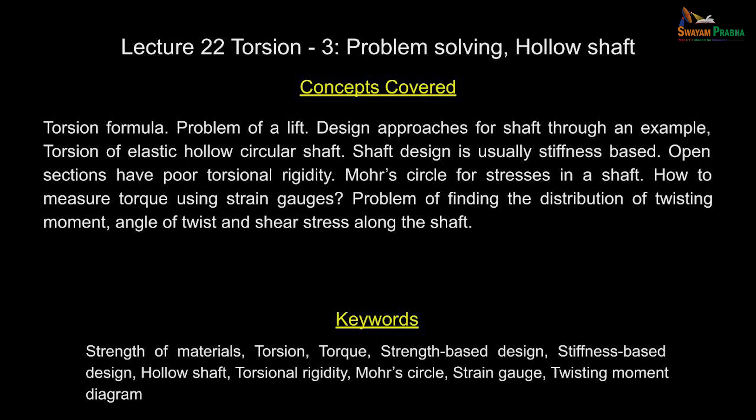Let us continue our discussion on torsion, and we shall solve some interesting problems today to get the idea of how to use the equations that are developed, and what are their limitations.

Now this is a very interesting practical problem. You have a lift system, you have a lift, there is also a counterweight. Periodically they will come and maintain the lift, and at that time it is possible for you to see the counterweight in the lift system. This is in an apartment. Those lifts are much smaller than what you have in our institute, or when you go to hospitals where they have a huge lift.

The question here is, if you get onto any one of these lifts, there will be a board that says how many persons can enter into the lift, and you have an electrical system. If the persons are more, it gives a buzzer and one person has to get out, only then the lift moves.

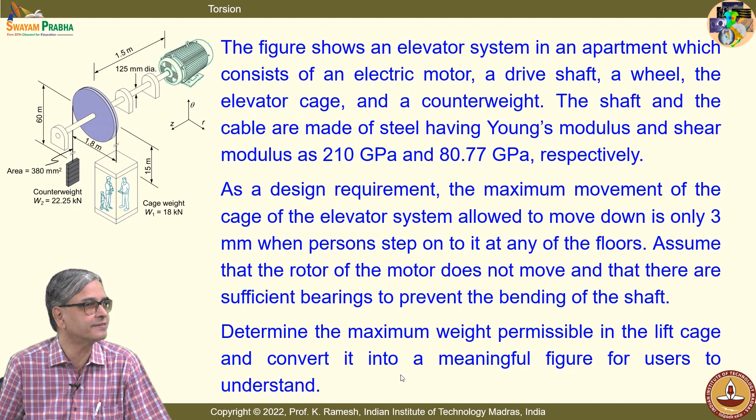So at the design office, the person has to decide how the system stiffness is so that it meets all the requirements. Here the requirement is when the lift is standing at one floor, that means everything is static, you can permit only a downward movement of 3 millimeters. So at the design office you have to find out what is the stiffness. Is there anything you have to do with shaft design? All this you have to take care of, and based on this the designer also has to decide how many people can enter into the lift. So you have to have a pragmatic approach and bring in some kind of factor of safety.

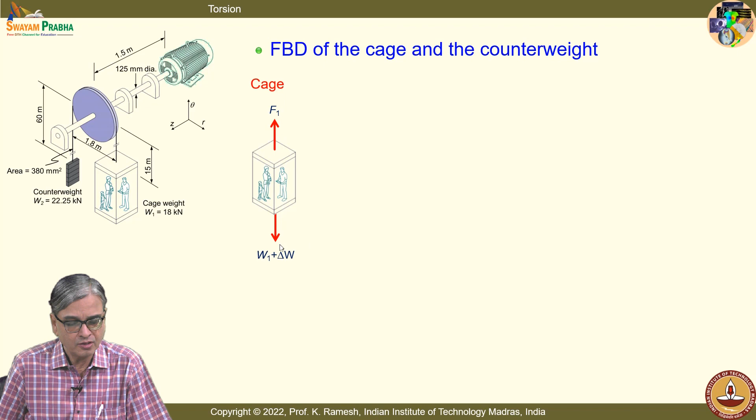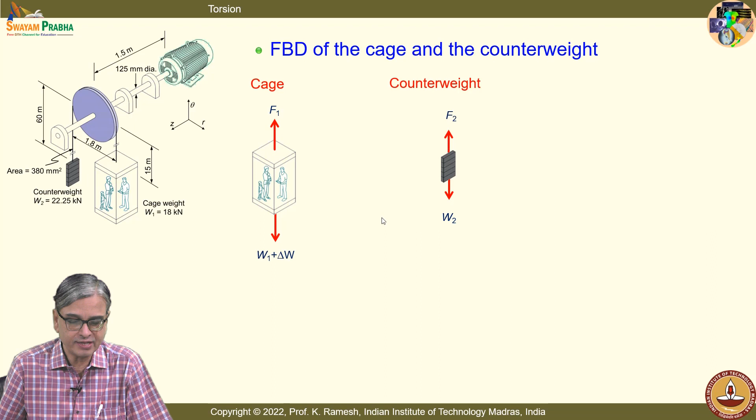One of the simple things you can do first is look at the free body diagram of the cage, and also the free body diagram of the counterweight. So what you have is a dead weight of the cage, put as W1. Let us imagine the lift was empty to start with, and some people have entered into this lift, that is delta W, or in other words, how many people it can accommodate is the question. So you have to put a label inside the lift saying how many people can enter. This free body is simple, and you get the force balance as F1 equal to W1 plus delta W.

You are given the cage weight is 18 kilonewtons, and you have the counterweight as 22.25 kilonewtons. Now the question is...

What all aspects of the system will contribute to a downward movement of the cage? You must understand that the motor stopped, there is no rotation from the motor. So it is standing at a floor and people step into it.

And you know very well that we are discussing torsion, so something with torsion is going to happen, and that you will recognize. Because many times when you solve a problem, if it is given in a particular chapter, you take advantage of that. In reality, if you are given a physical problem, you should know how to dissect it and find out what contributes to it. Is the idea clear?

So what is the contribution from torque? Can you imagine, I have a shaft. This shaft is supported at 2 bearings on this side and 1 bearing on the other side, and you have a big pulley mounted on the shaft. You have a counterweight and you have the lift cage. You are also given the length, this is about 1.5 meters.

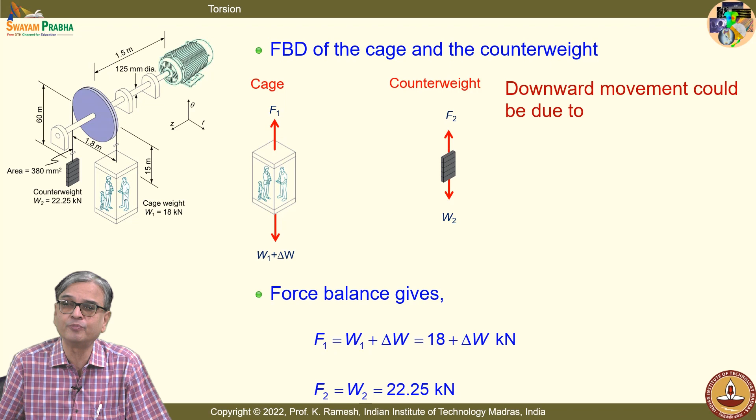So you are going to have this shaft, it is not a rigid body, it is deformable, so it develops a twist. Because of the cage weight there is a twist already, and because of some people entering the lift there is a change in weight, change in torque, that contributes to angle of twist, which will get magnified by this big wheel, and you will see this as a vertical downward movement of the lift. So that is very clear, angular twist of the shaft is very clear, that you can employ the equations and find out what it is. What are the other aspects that can contribute to downward movement?

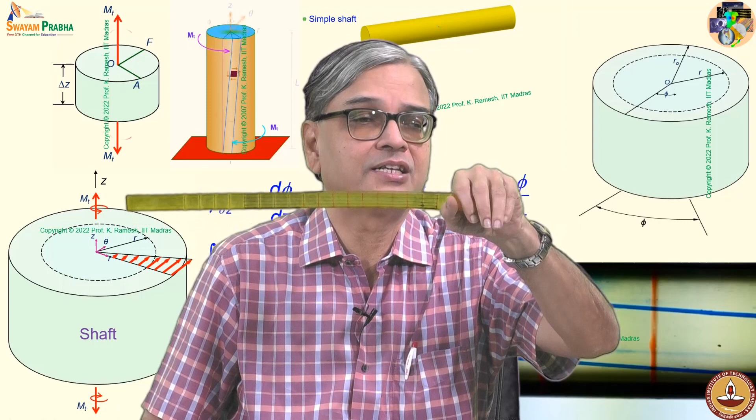Can you guess what are the other movements that can contribute? See, I am holding it on one side, what you find is it's sagging. So I put a support, I put one support, the sagging is very much limited. And what is given in the problem?

The problem says that I have 3 bearings, 1, 2 and 3. They are sufficiently close enough so that any deflection due to bending, you can ignore it. That is given in the problem.

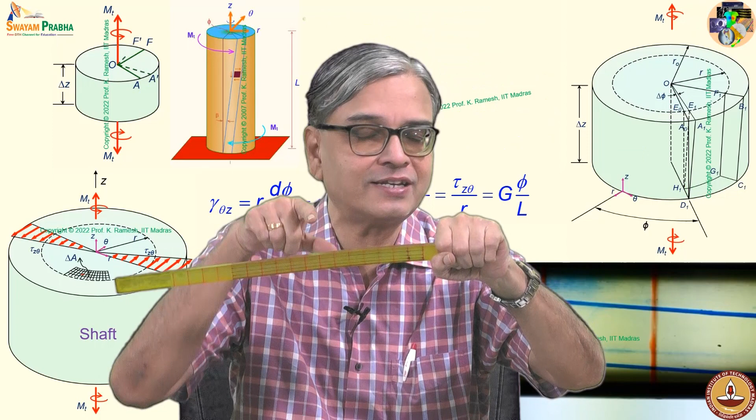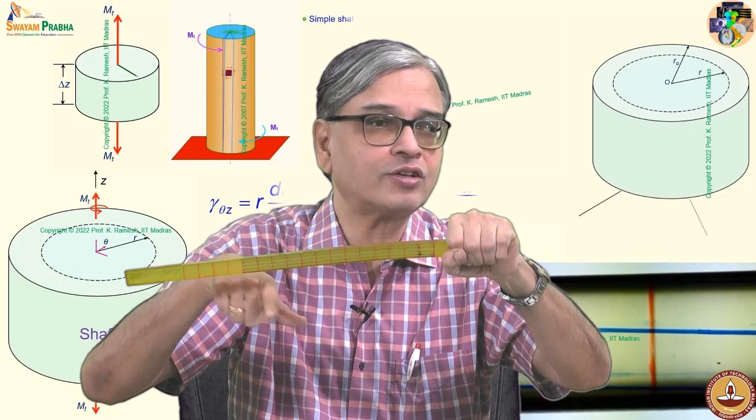There are 2 ways of looking at it. You don't have a background on bending, so you cannot calculate what is the deflection due to bending. When I put a support, the shaft remains horizontal, that's fine. But if I have additional load which is very heavy, this is going to cause a deflection. You don't have a background, so for the time being, let us ignore, as it is also given in the problem statement, the bending of the shaft, though it can contribute to vertical deflection, let us ignore it for the purpose of solving this problem.

Is there anything else that can contribute to downward movement? Stretching of the wire, that's very good. I have a cable on this, so I have a stretch of this. That you may miss it.

Fine, so you also have extension of the cable. So we have to account in this problem only 2 aspects: angular twist of the shaft and extension of the cable. Once you have understood what is to be done, then rest of the problem is application of what you have learnt earlier. Simple and straightforward.

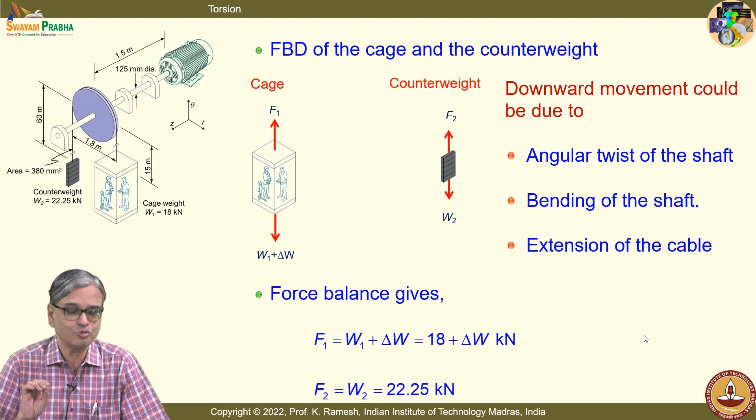Is the idea clear? I would like you to use your calculators and get me the numbers. So increase of torque due to weight of people: I have delta W into radius of the pulley, and that's also given, you are given diameter as 1.8 meters. So I get this number here.

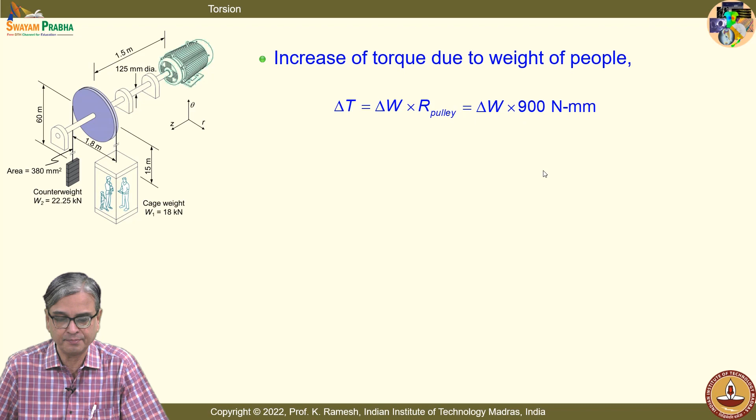And what is the increment in the angle of twist? So I have delta T L by G IP, and you know what is the IP for a circular shaft. So I get this as pi by 32 into 125 power 4, and your G is given in the problem statement as 80.77 into 10 power 3. And I have delta W into 900 is the torque additionally developed, and the length, it's also expressed in terms of millimeters. So I am in a position to get what is delta phi when I see from this, this is as a fixed end, and then it comes to this portion.

So I have extension due to torque increment. I will have to multiply this angle of twist by the radius of the pulley, so it gets magnified because of the diameter of the pulley. We have taken the radius, from the diameter get the radius, and you get the extension or downward movement due to torque is given as 0.627 into 10 power minus 3 delta W millimeter.

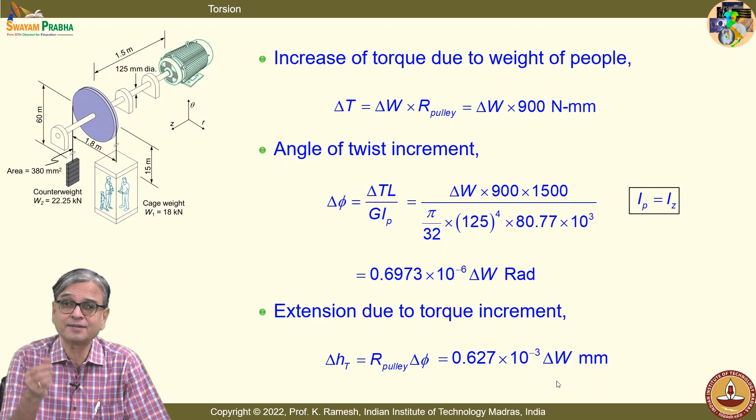We still do not know what is delta W. See, a problem becomes a design problem when limits are given to you. This is a design problem because limits are given. You are given the maximum downward movement permitted is only 3 millimeter. How you arrive at it, that is a big question. It's not like somebody has a dream and then says 3 millimeter. There are physical considerations, so you have to look at that, that is a difficult aspect of it, how to set limits for you to do the design.

And a steel cable will extend as well as due to tension. And you know, for axial load, a very famous expression we have got. Do you remember? In terms of applied load P, the extension is given as, these are all very famous expressions you should remember, PL by AE. Don't forget that. Now replace what is P, what is L, what is area of cross section, and what is Young's modulus.

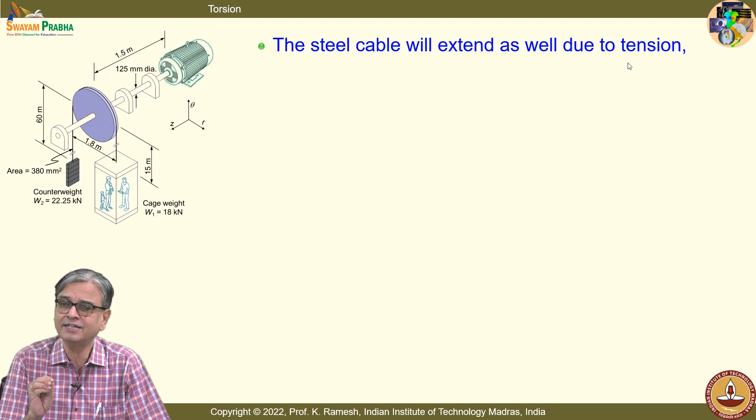We are talking about delta W as the additional load because of number of people who step into the lift. So this is P, so PL by AE. So I have this number substituted. So I have this area of cross section, the cable, the dimensions are given, so you have to look at that. Area is given as 380 millimeters squared. You do not have to do the calculation yourself, it is given in the problem statement, and Young's modulus is given.

So this gives me, when I substitute the numbers, I get this as 0.188 into 10 power minus 3 delta W. And it is given in the problem statement that this extension should be limited to 3 millimeters. So you can easily find out what is the delta W acceptable. It's child's play, just substitute these numbers and equate it, and when you get the delta W, it comes to be something like...

3678.36 newtons. See, engineers look at things from a physical perspective. So this amounts to how many people?

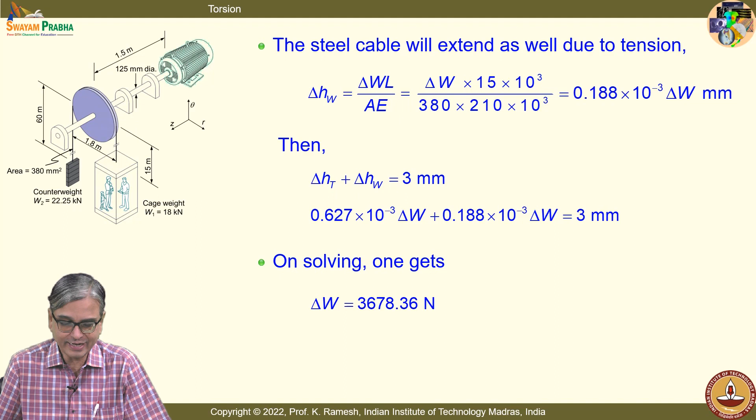Suppose the weight of a person is 70 to 75 kg, so it can accommodate about 5 people. But as a designer, you want to have some factor of safety built in. So even though 5 people could step on it, for a conservative design, permit only 4 persons. Put a label: beyond 4 persons, do not get onto it.

This is one way of learning. While you design, you take care of anything not calculated or included, any manufacturing defect, any problem in the cable, all that you build in by bringing some kind of factor of safety.

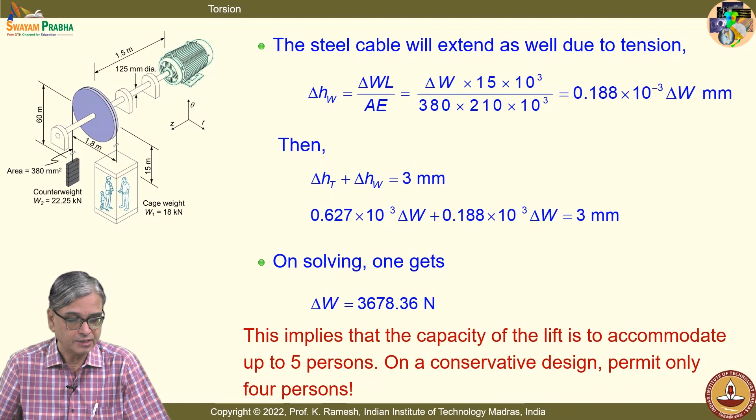The cable is not a simple rod or wire. You will have multiple strands twisted, and the factor of safety for a cable design is altogether different. You will have a factor of safety of the order of 10, because any small problem there can be disastrous.

That is what is needed when you have a cable car, not a lift, but a cable car, exposed to natural elements and high wind. You must have seen in the papers that people got stuck in a cable car, and the army helicopter goes and rescues them, all that happens.

So factor of safety is a very important concept. You have to apply it depending on the context. For a car design, it was initially 4, now they have brought it down to close to 2 or less than 2. But for a cable design, the factor of safety is very high, a factor of 10.

When designing a nuclear power plant, the factor of safety will be very high. You do not want to take chances, because nuclear radiation deteriorates the material. So there are many considerations that go into it.

So a problem becomes a problem of design when limits are set. How to select the limits is a very big job to be done. Once you set the limits, you know how to use the equations and get the calculations.

Now we move on to the next simple but interesting problem. Consider a steel shaft. I have deliberately taken simple problems; the focus is to learn the use of equations and appreciate what happens when doing a design from one perspective. Here, the shaft can withstand a maximum stress of 60 MPa. There is also another requirement that the maximum angular twist permitted is only 1.25 degrees. The question is, evaluate the shaft diameter based on strength and based on stiffness.

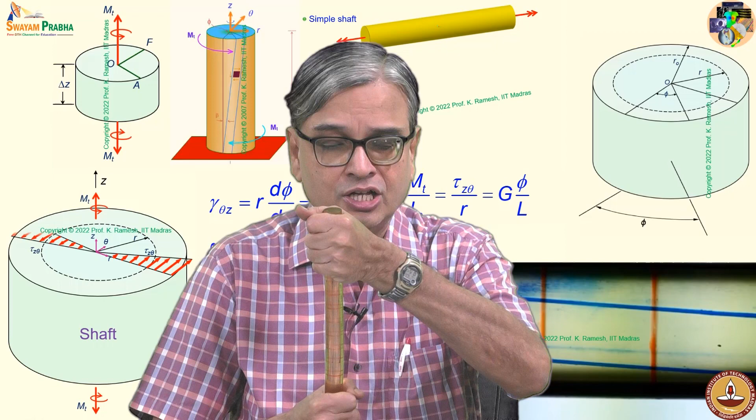While you solve this problem, let me circulate this so you can have a feel of what happens in the case of a shaft. You twist it yourself and see what happens. Can you correct it and then let this be circulated?

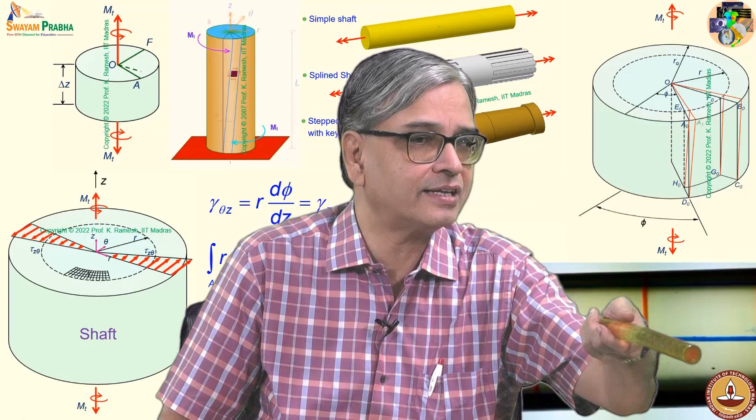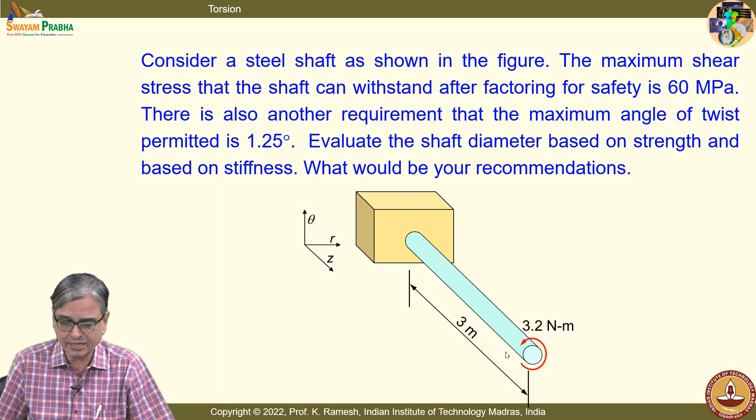So the problem is simple and straightforward. There are no steps in the shaft. It's a simple cylindrical member, and the twisting moment is given.

You should understand that we have taken the axis of the shaft as the z direction because it is a circular shaft. We have taken polar coordinates to define the circular boundary, and the twisting moment is nothing but Mz. The moment of inertia we want to calculate is actually the polar moment of inertia, because when you go to bending, you will again see Iz, but that will be a different moment of inertia. To avoid confusion, we adopt this symbolism.

So we have this maximum shear stress introduced from our torsion formula: MT R divided by IP. The stresses are maximum at the outer diameter, so R max is d by 2, and IP is pi d power 4 divided by 32. So the maximum shear stress in a cylindrical shaft is 16 MT by pi d cube.

This expression is also worth remembering for design calculation, design of a circular shaft, because when a shaft is subjected to torsion, it is also subjected to bending, and it can also have axial force. So once you learn bending, you must also get the stresses because of bending.

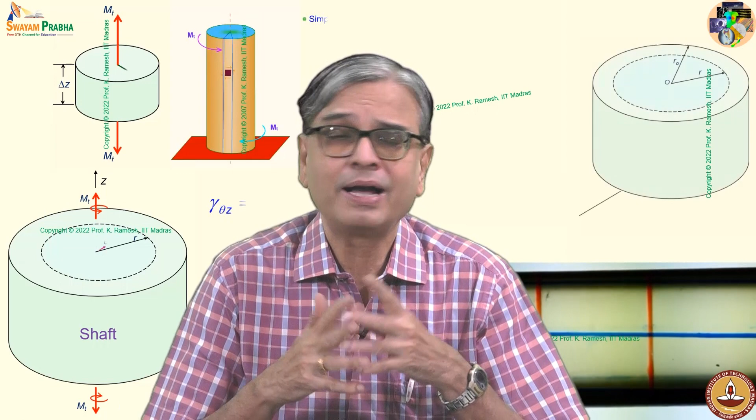And it is given the maximum shear stress is 60 MPa. I would like you to appreciate, you have looked at mild steel, the yield strength was something like 240 MPa. And I said that you will never go to yielding in a real life structure, you will work much below that. So I work half of it, that is 120 MPa.

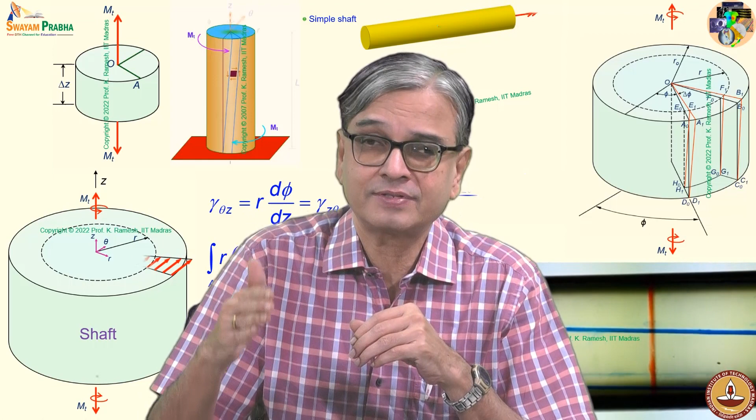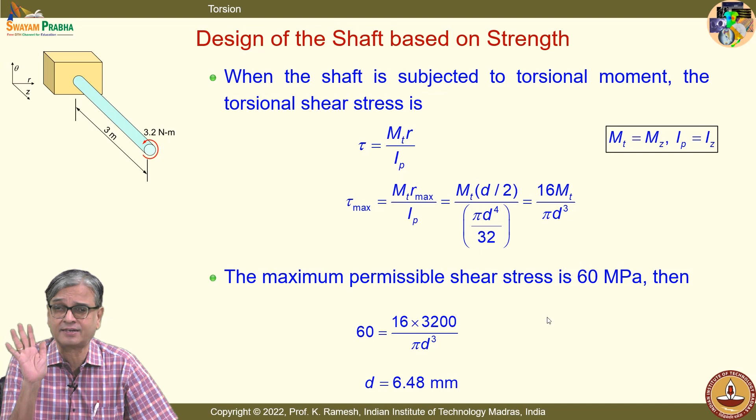Then I said that you have repeated loading. In the case of a problem which I have shown, there is no torsional oscillation. On the other hand, if you go to an IC engine, you also have torsional oscillation. So there the torsion is going to change as a function of time. Suppose I want to bring in, when the shaft is rotating, because of rotation, the bending stresses will oscillate. Suppose from that consideration, I would like to have the maximum stress limited as 60 MPa, that is 1/4 of the yield strength of even the mild steel. Mild steel has very low yield strength. Alloy steel is about 550 or so. So even the cheapest material, we don't want to load it.

And when I do the calculation, what is the diameter that you get? Is it a shaft or a rod? It is no longer behaving like a shaft, it's like a very thin rod. And naturally, you would expect that this is going to have a very large value of angle of twist. Is the idea clear? I have taken to start with 1/4 of the yield strength. I have not applied very close to the yield strength, very, very small stress I have taken. Even when I take a small stress like this, I get a number which is very funny. D is 6.48 millimeter. I want you to calculate the angle of twist for this.

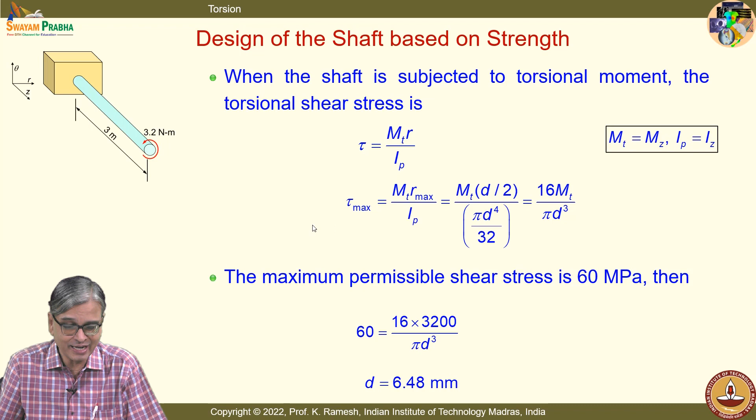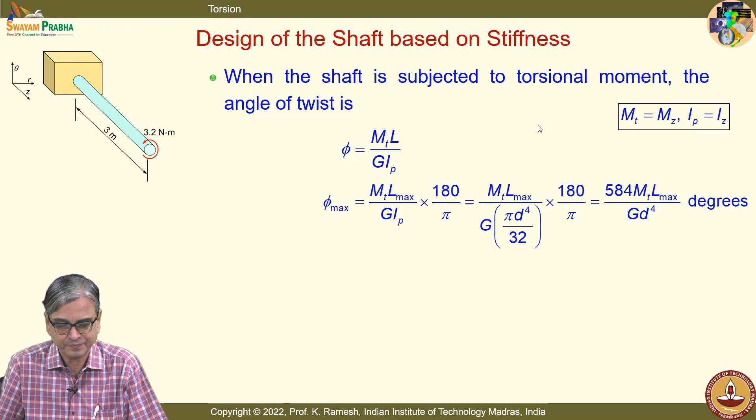Do the calculation. And in the meanwhile, let me also go and proceed. We have also said the angle of twist should be limited to 1.25 degrees. That's given in the problem statement. And I have the expression for this is MtL by GIp. And I have already said GIp is a torsional rigidity. So when you solve problems in future, calculate this GIp and keep it at one place so that you can repeatedly use it for various purposes. And the angle of twist will be maximum when L is maximum, that is at the free end.

So I get this as when I substitute these numbers, I get this as 584 Mt into L max divided by G d power 4 degrees. I have already told you in the development of the equations, phi was in radians. Never forget that. It was in radians. What you get from this basic expression is in radians. I convert the radians into degrees using this 180 divided by pi. So I get this is in degrees. So when I limit the angle of twist to 1.25 degrees, I get a reasonable size of the shaft, which is 15.35 millimeters. It is something better than 6 millimeter.

So now we have to do two calculations. One calculation is, when I take a diameter of 15.35, what is the maximum stress generated? Even before calculation, can you tell me which will be more or less? When I have a shaft whose diameter is increased, we have earlier calculated the diameter is only 6 millimeter if the limiting stress is 60 MPa. Now I have increased the diameter, almost double the size. It was about 6 millimeter, this is about 15 millimeters, slightly more than double. Do you expect the stress developed is more or less? Why do you say it is less? Okay, that is good. He has coupled, when the radius is more and more, stress is high, but inertia also changes. So he has coupled and then said it is proportional to d cube. So you will anticipate the stress levels will be very much smaller when I go to this.

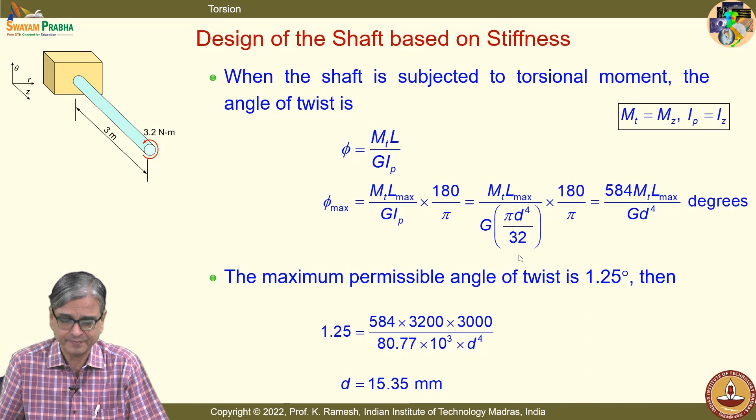Suppose I also put another restriction, even 1.25 degrees is not acceptable. I want to bring home a point. Whenever we want to understand anything, we want to have very large deformation.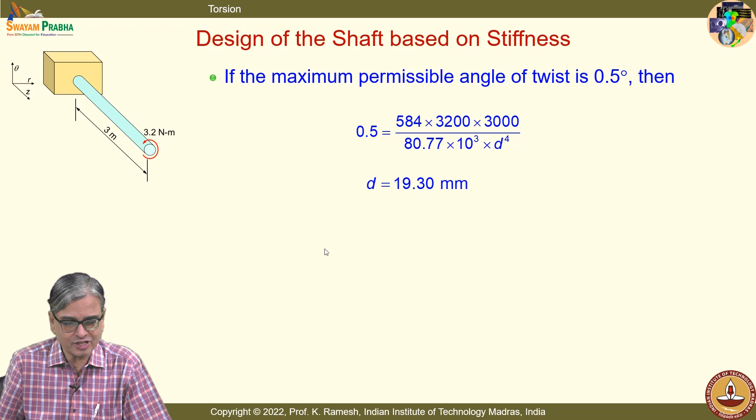Before we discuss the problem further, I want to also discuss what happens when I have a hollow circular shaft. It's very, very important.

The same equations are applicable. So you make a concentric hole, and I have only a shaft like this. I have also brought this—so you have a tube. You have a particular thickness for this, you can see, and it is also very strong.

When I twist it, I am finding it very difficult to twist. It is made of plastic only, whereas the other one I circulated is made of soft material, solid. This is also solid, this is also plastic. But when I have it in the form of a tube, it gives an impression that it is very strong. Don't you feel so? Let us see what the mathematics say.

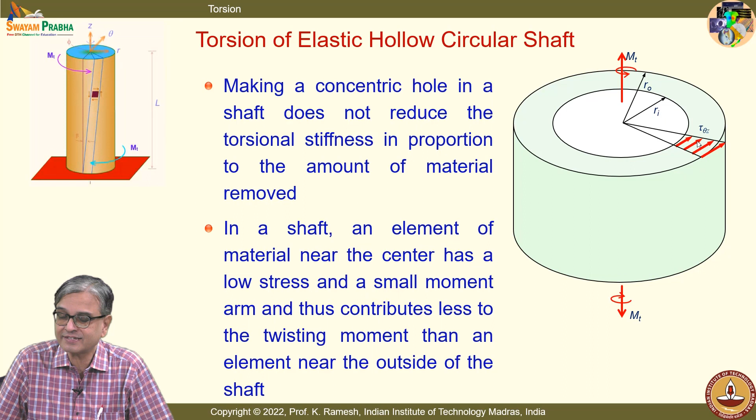This is also applicable. Instead of going to zero, the shear stress stops at whatever value the inner radius can develop. The difference comes in the moment of inertia. I told you, among the various mathematical quantities, this is what recognizes the cross section. You must appreciate that when you change the cross section, the moment of inertia changes.

You all know, if I have the axis like this—suppose I have a smaller tube like this, and a bigger tube like this—the moment of inertia is going to be higher because the material is put away from the center. The farther away from the central axis, the higher the value of moment of inertia. So the moment of inertia calculation will be different.

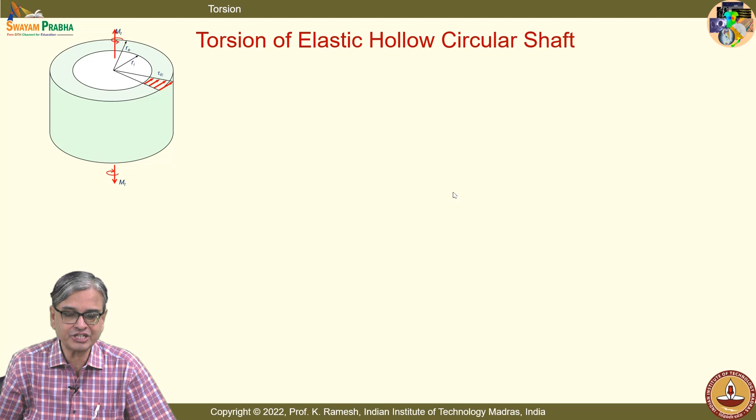The equations you have derived are still valid, and Iz or Ip is now pi times d-naught to the power 4, divided by 32, multiplied by 1 minus (di by d-naught) to the power 4.

Also, in your design, people may specify what the ratio of di by d-naught should be—that makes your calculation simple. When you take a hollow shaft, you try to make the diameter a little more so that you use less material but achieve higher inertia, because you have to satisfy both the stress levels and the twisting requirement.

Both are necessary. So now we will go back to the same problem and calculate what the dimensions of a hollow shaft should be to support the same load. That will give you clarity on whether a solid shaft is better or a hollow shaft is better.

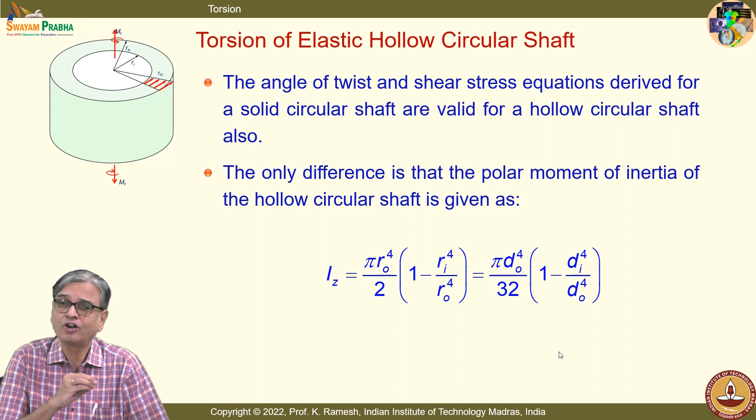Is the idea clear? The polar moment of inertia is given right here. We will also calculate—remember we limited the angle of twist to 0.5 degrees and got the diameter as 19.3. You are also given another simplification: take the value of di by d-naught as 0.6.

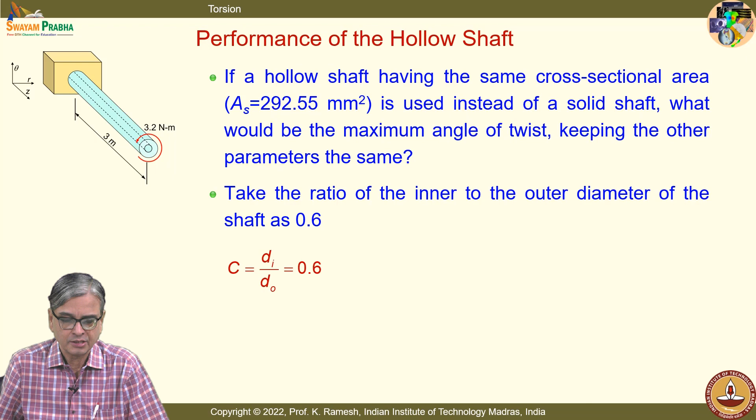That is given in the problem statement, because I can construct multiple hollow shafts even if I want to match the same area of cross section. So what you have is the area of cross section of the solid shaft. I have calculated it again so you really associate the results to this problem. I limited the angle of twist to only 0.5 degrees, and got the result as 19.3 as the diameter. So I calculate the area of cross section.

The comparison would be valid since I use the same material to construct a hollow shaft. When C is also given, if you do the calculations, it is possible to find that d-naught should be 24.125 millimeters and the inner diameter is 14.475 millimeters.

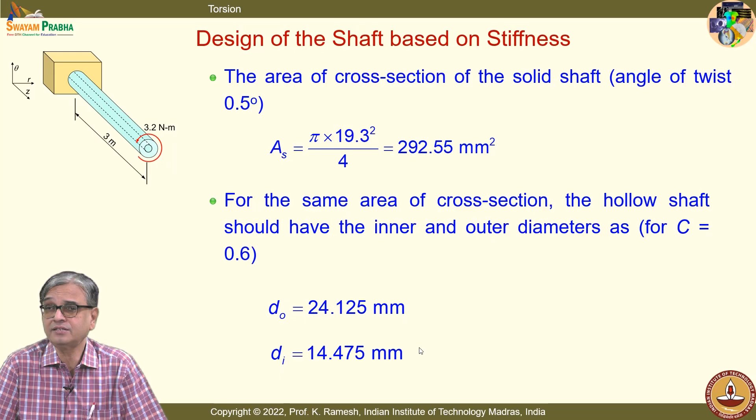So the wall thickness is something like 5 millimeters. You know why I mentioned the wall thickness? Because you want a higher and higher value of moment of inertia—you increase the outer diameter and keep reducing your wall thickness. You can also do that, isn't it? Why am I talking about wall thickness? Can you guess where you might anticipate a problem?

Where do you anticipate the problem? I am going to twist it. I am going to take the shaft and twist it.

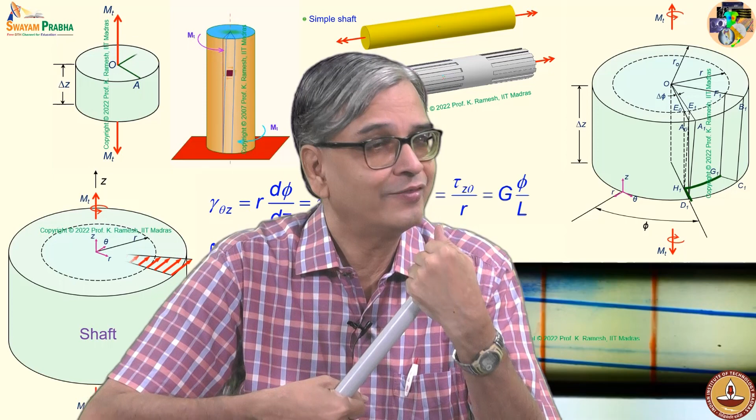When I twist, what is the kind of state of stress there? Shear can be viewed as what? At 45 degrees, what do you see shear as? Tension and compression.

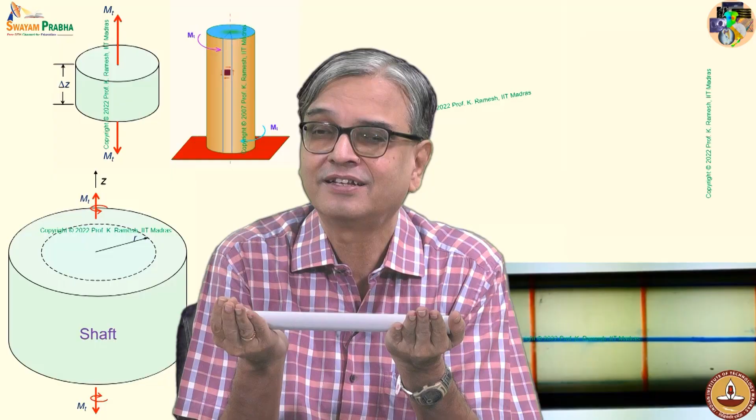So compression is going to give me a problem. When you have a thinner and thinner section, when I have a compressive load, it can buckle. I can have torsion buckling.

So you need to have a trade-off. If I increase the outer diameter, my moment of inertia is going to increase. But if I keep reducing the thickness, I may also reach the other extreme. When the twisting moment is transmitted, the shaft may develop buckling because of twisting.

People normally forget at the end of the course, because we develop the critical load when you have compression on the member columns, then people think only columns buckle. I have discussed it even in my initial lectures - buckling can happen whenever you have a compressive load.

Torsion also develops compressive load at some other planes. You should never forget that.

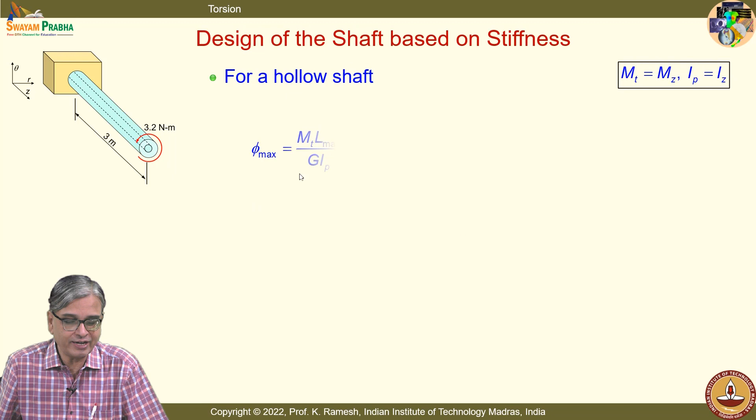So I go and calculate what is the angle of twist for this shaft, and when I substitute all these quantities, only the inertia changes here. So you can take the same expression and change the inertia and substitute these values.

You find for the same cross section of the solid shaft, if I use a hollow shaft with C equal to 0.6, as specified in your problem, the angle of twist is just half of it. That means solid shaft is weaker in comparison to a hollow shaft for the same cross section.

So what does this imply? I can also satisfy my design requirement by having smaller material than a solid shaft, so that I can save material. Is the idea clear?

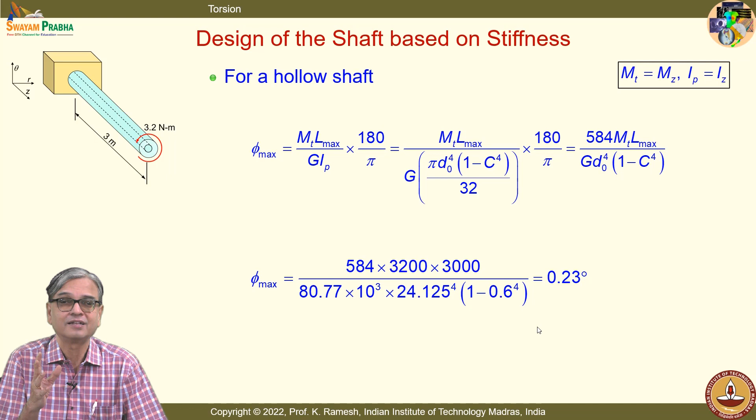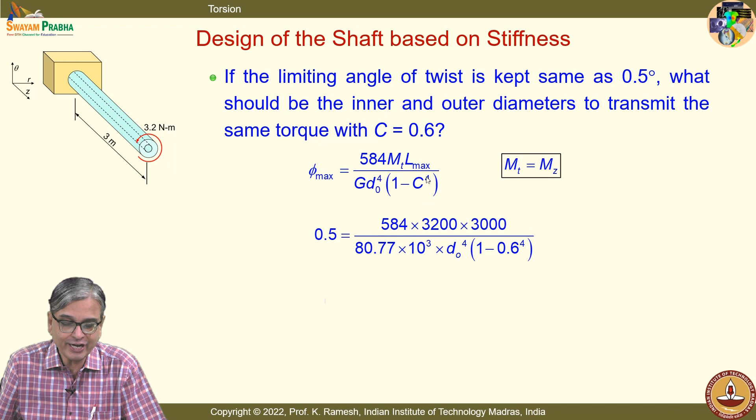Okay, and we will also do the calculation. If the limiting angle of twist is 0.5 degrees, I don't want to change it. Now I want to find out what should be my outer diameter and inner diameter.

The outer diameter and inner diameter are calculated, and then you find outer diameter is 19.98, slightly greater than what was there earlier, and inner diameter is 11.99 millimeter, and the difference is about 8 millimeters, considerably thick. It's not a very thin shaft.

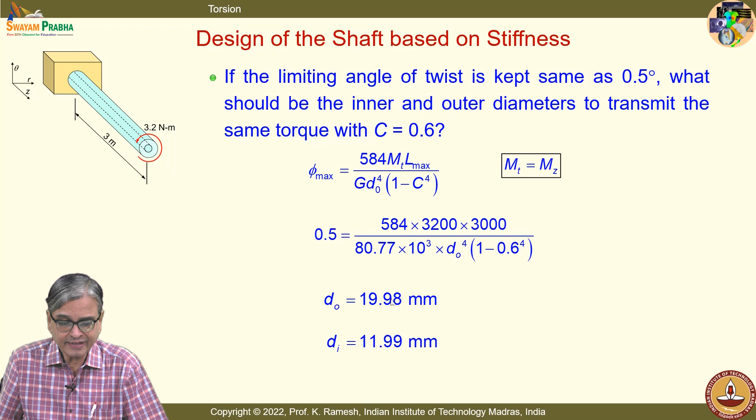So if I want to maintain my angle of twist at 0.5 degrees, it is enough that I use d0 and di like this. You can also calculate the area, and find out what is the change in the cross sectional area. And if you have the length, you can also say what is the change in weight.

Suppose you have a design requirement where weight is a consideration. If you look at LCA aircraft, their weight is a very important consideration. When you have a power drive shaft, that's all hollow in an aircraft, because every kilogram you save, you save enormous amount of fuel in its complete life.

But you go to Atta Chakki, you go and find only a solid shaft. Am I right? Why do people use a solid shaft when you find that hollow shaft is better? It uses less material.

You have to look at it holistically. I have to remove material, I have to pay money to get the material removed. You understand? And it should also be concentric.

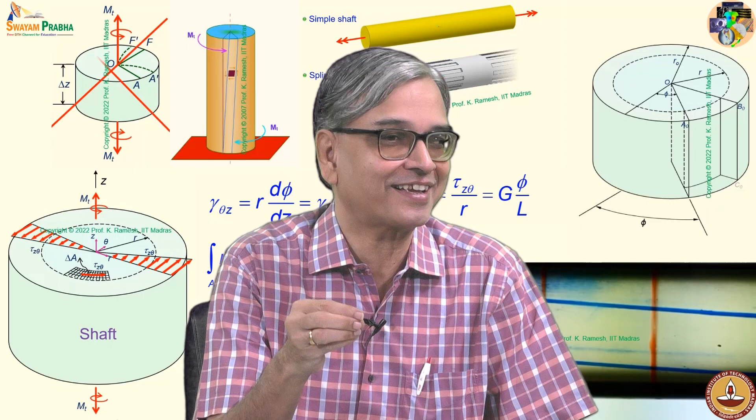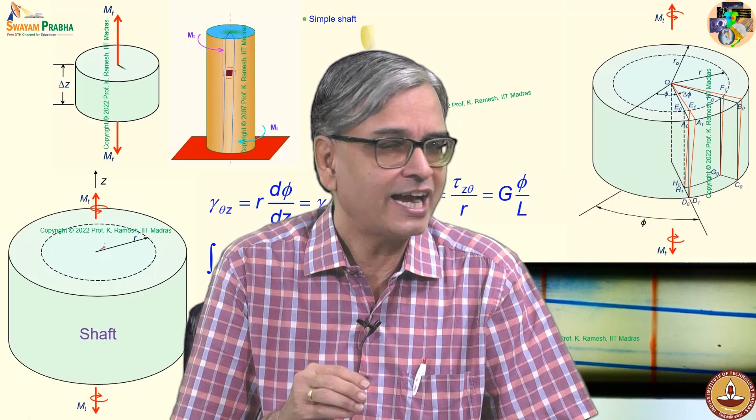So if you look at the manufacturing cost, in many of the design applications, day-to-day applications, there is no great advantage by using a hollow shaft, and also there is no great advantage in going for an alloy steel. It is enough I work with mild steel. Isn't it? Because when you see everywhere, you don't normally come across a hollow shaft.

Am I right? In many of the applications where you have access to, you find everywhere the shaft is solid, whereas your mathematics now says a hollow shaft is better. When it uses less material, it is better. That is one way of interpretation.

The other way of interpretation is that to get it hollow, you have to pay a cost. So you have to have a trade-off. And that cost advantage is necessary when I want to go for an aircraft design where it's going to save enormous amount of fuel.

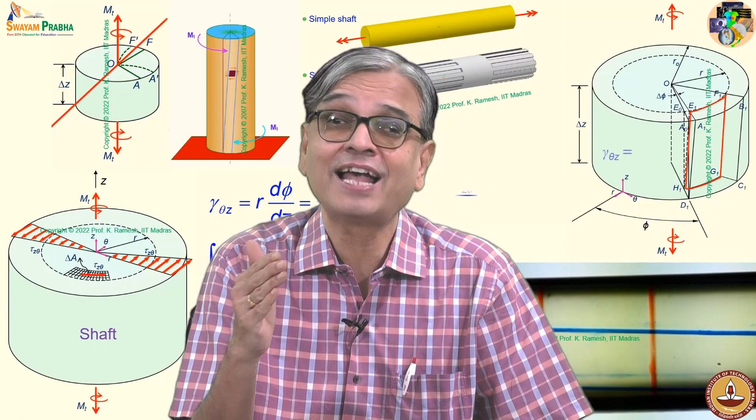Understand? So you are also learning strength of materials and also get insights on aspects of design. That's what you are going to do as a next course.

So I have two design approaches we have looked at. One is a strength based approach, another is stiffness based approach. In the strength based approach, we say what is the shear stress permitted, and I said we have not taken the 60 MPa arbitrarily. I said it is just 1/4 of the yield strength. It's very, very small, you are not permitting a very high level of stress. And when I do this, I get the shaft diameter as 6.48, which is ridiculous.

Okay, I have asked you to calculate the angle of twist. Anybody has calculated the angle of twist for this diameter? Please do the calculation and then verify with my table, because my table also has what is the final shear stress developed and what is the phi max. I want to do the calculation. I use the calculator and do the calculations.

And we have also analyzed the same problem based on the stiffness. You know the expression for stiffness as phi max equal to MTL by GIP. I said that you have to calculate GIP and keep it aside for your calculations. It's a torsional rigidity. And in this, I have also said an expression for tau max, 16 MT by - what is the value? We have also, I said it's a very important expression that you have to remember. So that is also a very important expression for you to remember.

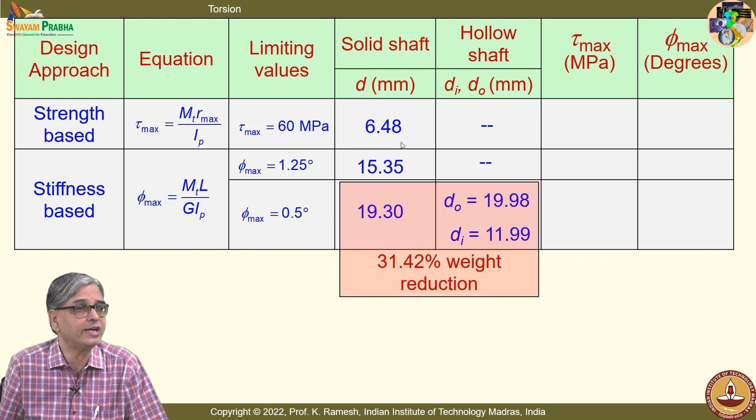Has anybody calculated the angle of twist for this shaft of diameter 6.48? Anybody has number? You are not doing the calculation. You should do the calculation and then check, because you should also pick up speed. You should pick up speed. It's only one simple expression you have to calculate, because you should also know what happens to the angle of twist.

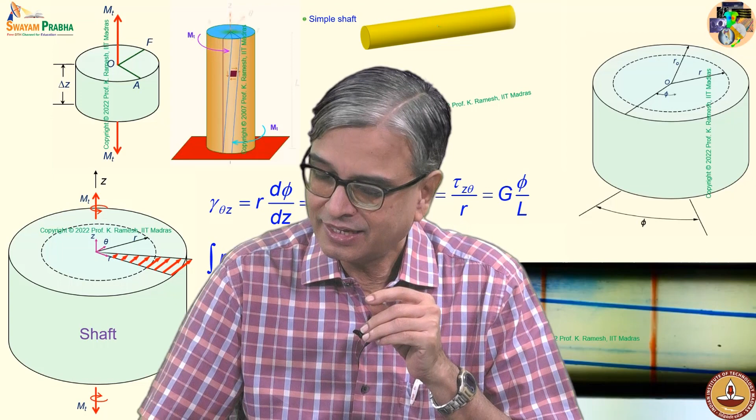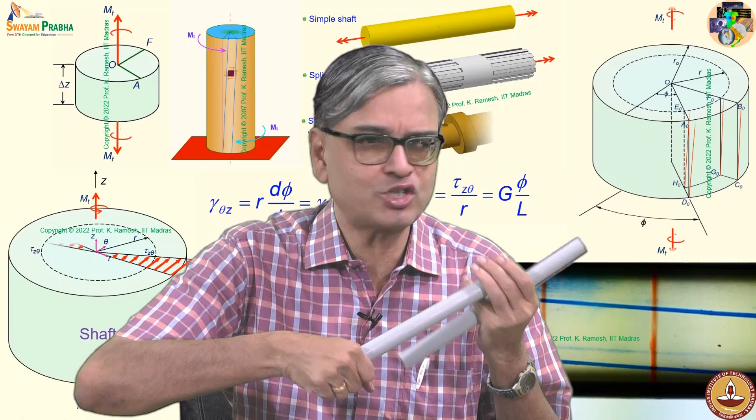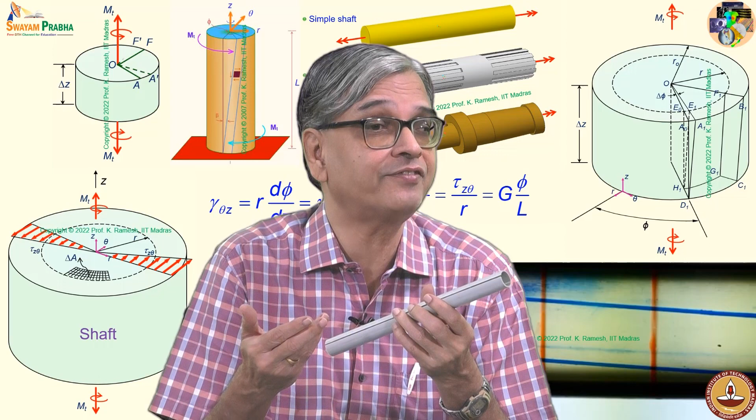Okay, in the meanwhile, when you calculate, let me ask one more question. See, I have shown a circular shaft. What I do is, we find that hollow shaft is very, very strong. Is the idea clear? Now what I do is, I go and make a thin cut here, I made a small slit here. What do you think it will happen? What will be its torsional rigidity? Because we have seen, compared to a solid shaft, a hollow shaft is very, very strong, isn't it?

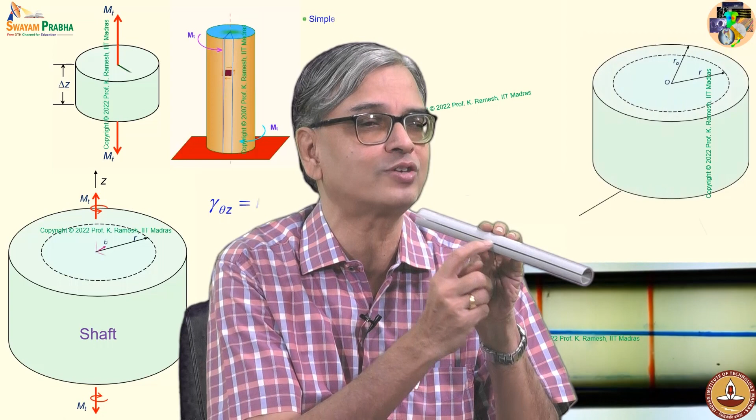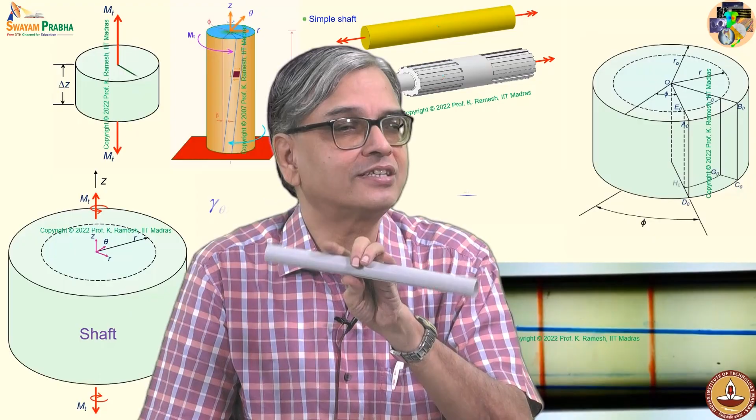Now what I have done is, I have asked him to make a thinner one than this, but he didn't have a cutter, so he had made this as a slit. What is your take on it? What will happen to the torsional rigidity? It won't change, it's like mathematician - you have an infinite plate with a small hole equivalent to a plate without a hole. I'm happy, I'm happy you have to give that answer.

Let me twist and show you. I'm not a very strong man, okay? Let me twist and show you what is happening. What is that you are seeing in reality? Drastically reduced. Do you get the feel? Do you get the feel? It is drastically reduced. So technically, these are called as open sections.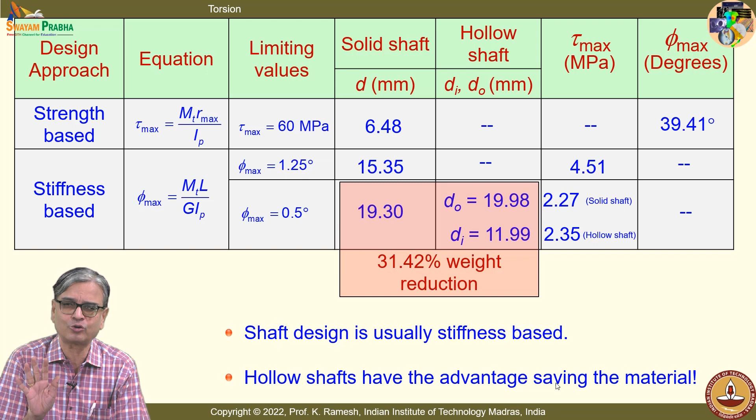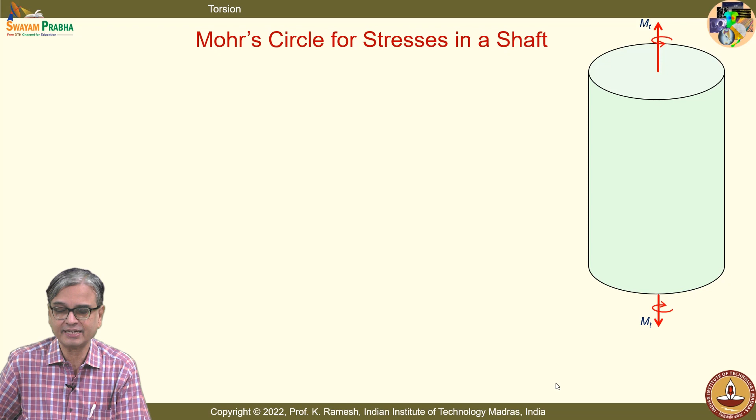And we have already seen the Mohr circle several times for the pure shear stress state, and you should recognize that torsion is a situation where I have a pure shear stress state, and the principal stress direction in the shaft is at 45 degrees. So this is shown in a different purpose, kept in a vertical direction, and this is drawn.

Can you draw the element at 45 degrees and show tension and compression just below, and check with my diagram? You should also apply your mind while learning, keep applying your mind and then find out what is happening.

So I have the shear stress indicated like this. Tell me where I will have tension, where I will have compression. Just below this, draw the element which is at 45 degrees. Tell me which is the direction where you have tension, which is the direction where you have compression. When you draw the Mohr circle, you can easily locate, but even without the Mohr circle, the moment you see the stresses here, you should be able to do that. These are all training. You understand the concepts better, and then you find out how to get this.

So I have this as tension and this as compression, which you can also verify from the Mohr circle.

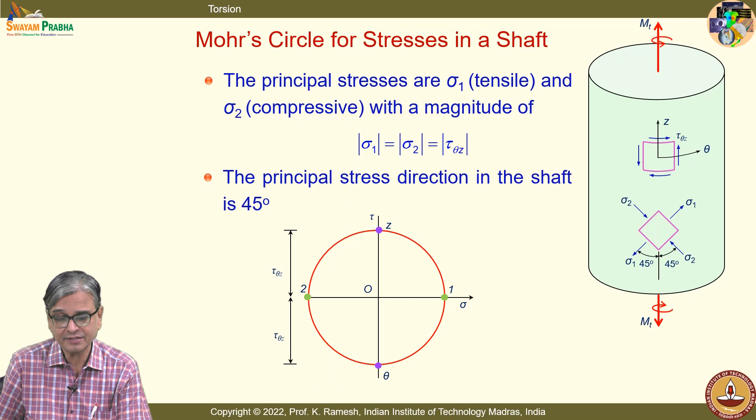And we have also seen how to paste strain gauges, am I right? Let me go back to that, because these are the things that engineers have to do repeatedly. You also have an experiment in your strength of materials lab where you find out the torque using strain gauges. So you have the stress state drawn for you to visualize very clearly, and this is what we had seen when we developed strain gauges for measurement of strain.

We have looked at the problem like this, it is twisted anti-clockwise, and then when you draw the side view, the strain gauges are connected like this, pasted like this at 45 degrees. Why 45 degrees? You have the reason - strain gauge can measure only the axial strain, it cannot measure shear strain.

So you measure the tension and compression, and you should also recognize what is the way for this I am drawing, for this picture I am drawing. Don't confuse this with this - this is drawn vertical, this is drawn horizontal. For this I am drawing the shear.

And you also know that epsilon 1 and epsilon 3 are positive, epsilon 2 and epsilon 4 are negative. You should also connect them appropriately in the Wheatstone bridge. So they are connected like this - I have 1, 2, 3, 4. So when the adjacent arms, because of opposite signs, they add up. Opposite arms like strains, they add up. So I get 4 times the signal.

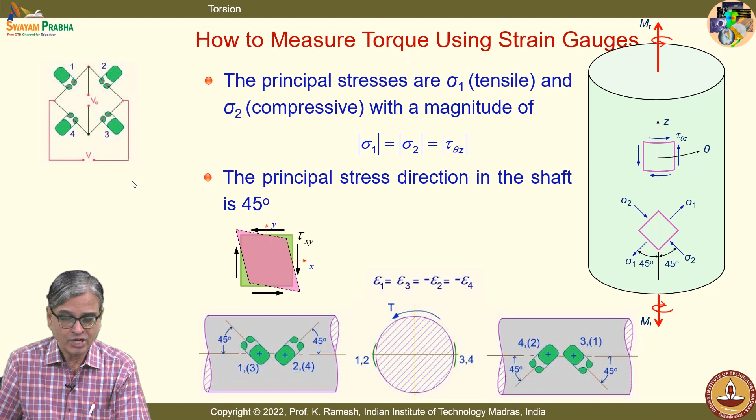So when you want to use strain gauge as a torque sensor, you want to maximize the signal. So you use Wheatstone bridge, all the 4 arms of the bridge, and you use the knowledge of what is the stress state introduced in torsion in making the measurement also. Is the idea clear? So this is also a review for your strain gauges. You should take it - I consciously repeat concepts. The same concept you hear in more than one lecture, so that your assimilation should be better.

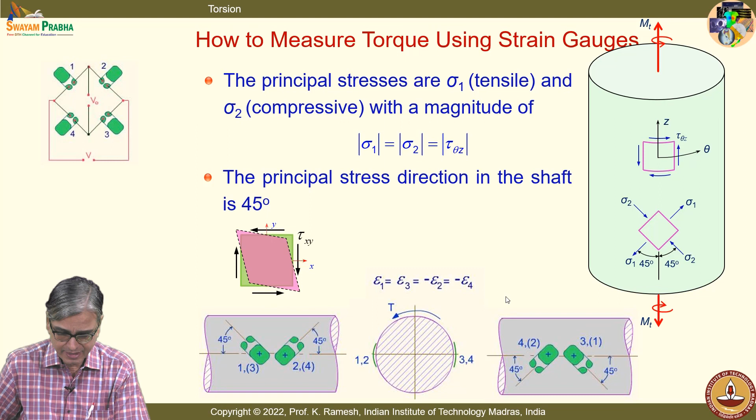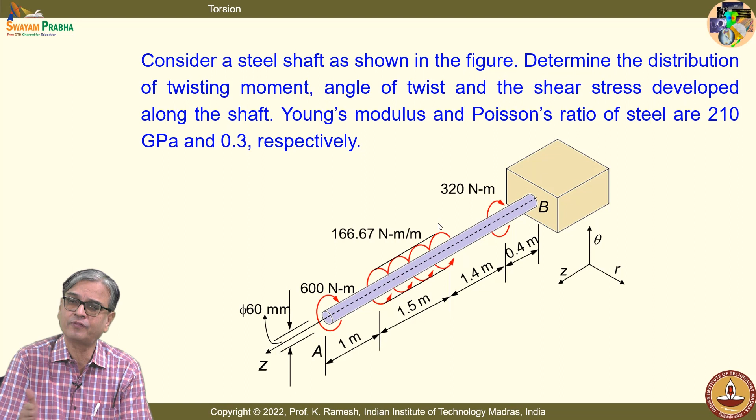Now we will look at the problem we had taken up earlier. We have already determined the variation of twisting moment. For the same problem, calculate the angle of twist as well as the shear stress. We will see some of it in class; the rest I want you to solve as part of your home assignment.

We have already looked at the twisting moment. I am just going to show this so that we have these numbers to calculate. If I want to calculate the angle of twist, I need to know the twisting moment at that cross section, so I am going to show one after another what is happening. This you already have in your notes. For the purpose of solving this problem, when you want to calculate the angle of twist, I need these numbers.

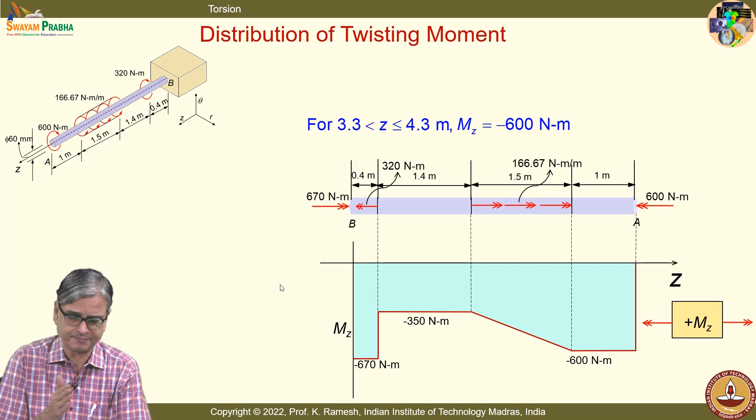Between the two, angle of twist and shear stress calculations are very simple and straightforward. For angle of twist, you have to keep track of what is happening along the length. So we will take up angle of twist first.

So I have this shaft shown, and we have the expression. At some section of the shaft, we need to use the integral appropriately, because I have a situation where the torque is varying as a function of length. The problems we have solved so far had a constant cross section and constant twisting moment. I may need to use this if I have a tapered cross section where Iz will be changing.

I can also have a shaft with one step. I can do that independently, but near the step our calculations will not be correct, so we hang on to Saint-Venant's principle. Away from the step, I know the values on either side, whether it's a smaller shaft or a bigger shaft. All that idea you have to make clear.

I can also have a shaft constructed out of two materials, like we have seen with a composite cylinder, where we equate the strain. Strain will be equated, but stress will be different. All these concepts are identical, so you can construct a variety of problems.

So while writing this expression, we have it with the axis reference, and I said it is better to put mt equal to mz and ip equal to iz. I will use this for the calculation, and I also said you should calculate torsional rigidity and keep it, because in this problem the entire cross section is the same. There is no change in the cross section, only the twisting moment changes. So once I calculate this, I can use it for all other sections.

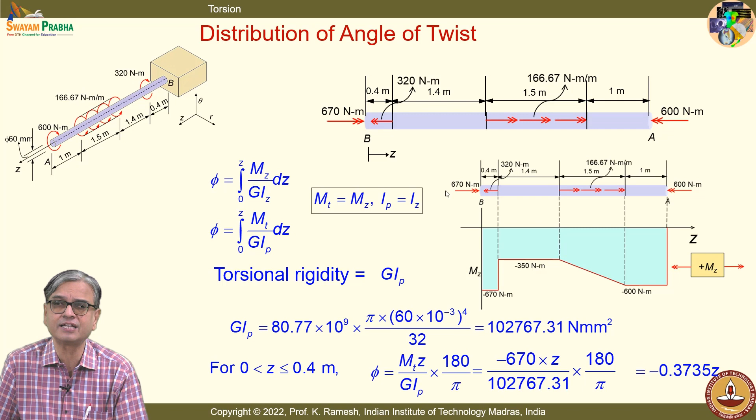Now I have to move from this section to the next section. I will just indicate what is the catch here and stop at that. So here I should have the angle of twist at this end and then bring in what is due to the next one. So I have Z here, and then starting from this, it is 0.4 to 1.8, which is why I have a factor Z minus 0.4 coming in here. Then I calculate this. And when I go to the next one, I have to do the integration of this. I will just show that and stop for this class.

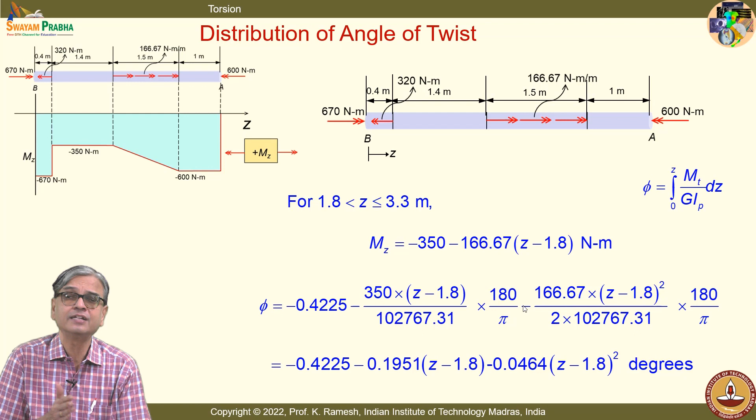So you know the expression for mz. I write the initial angle of twist, and then this I have to integrate. All along you have not done any integration, but because the moment is varying here, you have to bring in the integration.

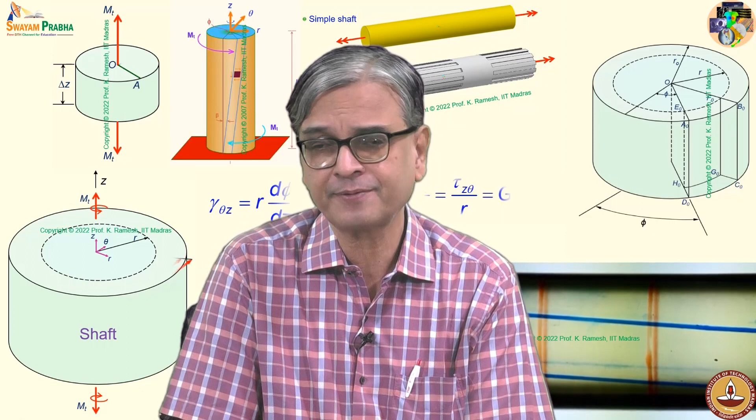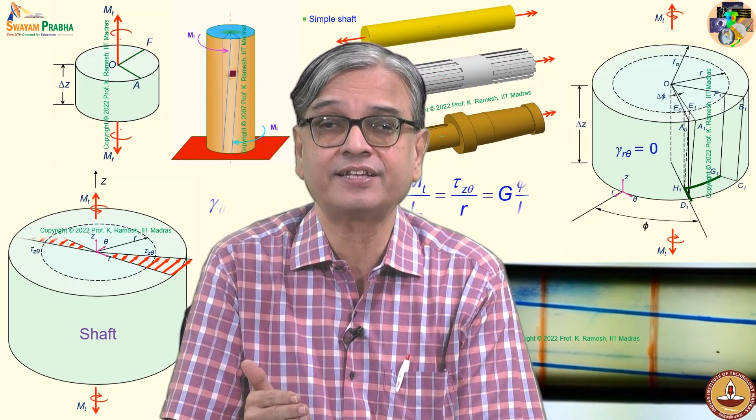So in this class we have solved some interesting problems. We have learnt that a hollow shaft is stronger in comparison to a solid shaft, and that any design of a shaft is always stiffness based, never strength based. We also discussed that if I have a thin slit cut in my hollow shaft, the torsional rigidity reduces drastically. Such sections are known as open sections, and any open section will have poor torsional rigidity. Thank you.